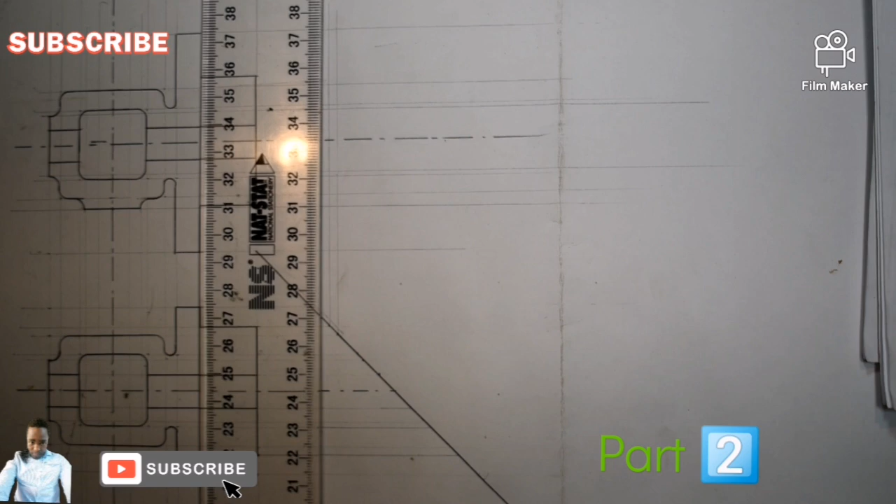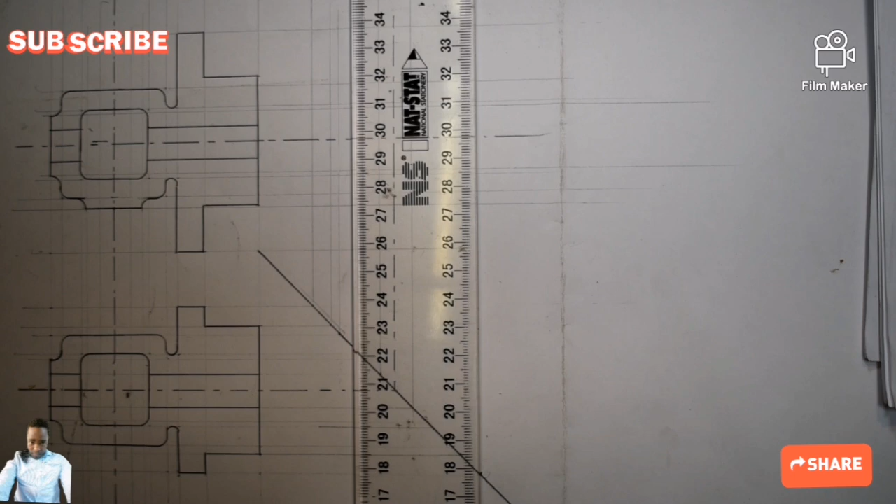Let's quickly finish up. So project this point up, this one up, there you go. So this one, it will remain as a center line. This is a center line. It's going to remain as a center line. So there you go. Yes, it's this one and that one. Let me mark them. There you go. The very last one is this one. You understand? There you go.

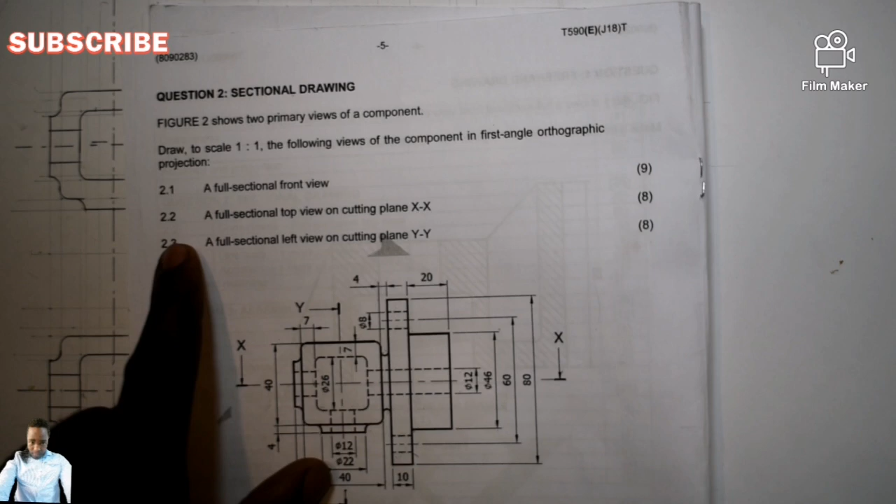Have this one. Have this one. So we are drawing the missing view. The missing view, which is 2.3, whereby they said to draw a full sectional left view on a cutting plane YY. And when you trace the cutting plane of YY, it's actually situated there by our front view. You understand? It could be situated in our top view.

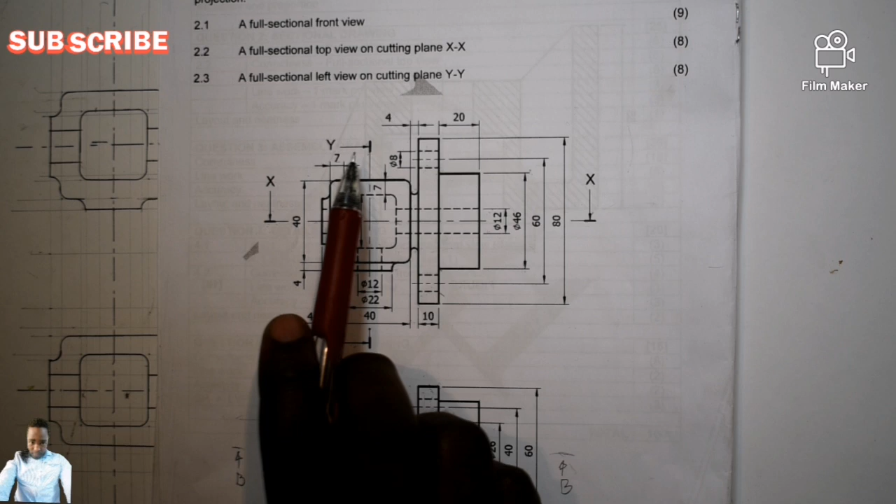It was still going to be the same thing, because we're going to project points. Once they touch the line of 45 degrees, they go up. So YY, and we draw what is being pointed by arrows, like I used to say. So our cutting plane YY, these arrows are actually pointing this direction. So this surface, we're going to see it clearly. So these diameter 8 holes, we are going to see them clearly.

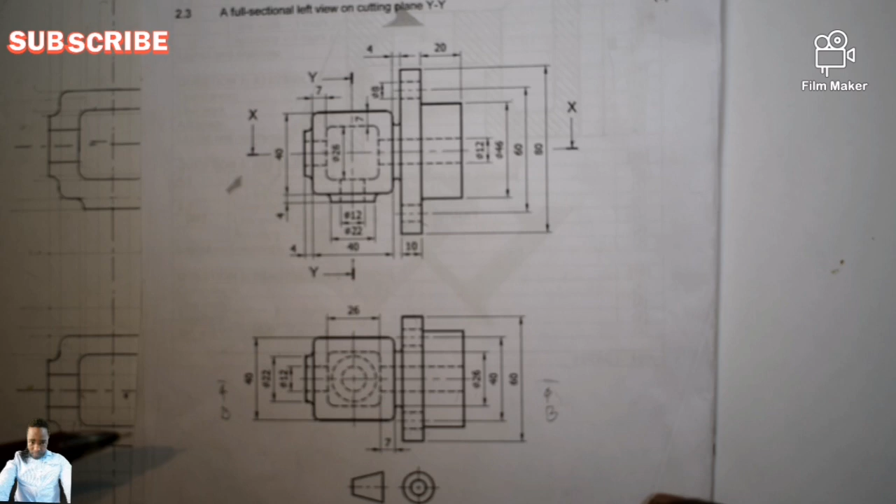So if there are 2 in our front view, do you see that there are 2 in our front view, and you check them again there by your top view, there are still 2, which means in total these diameter 8 holes, there are 4. You understand? That's when you're going to see them clearly. There are 4.

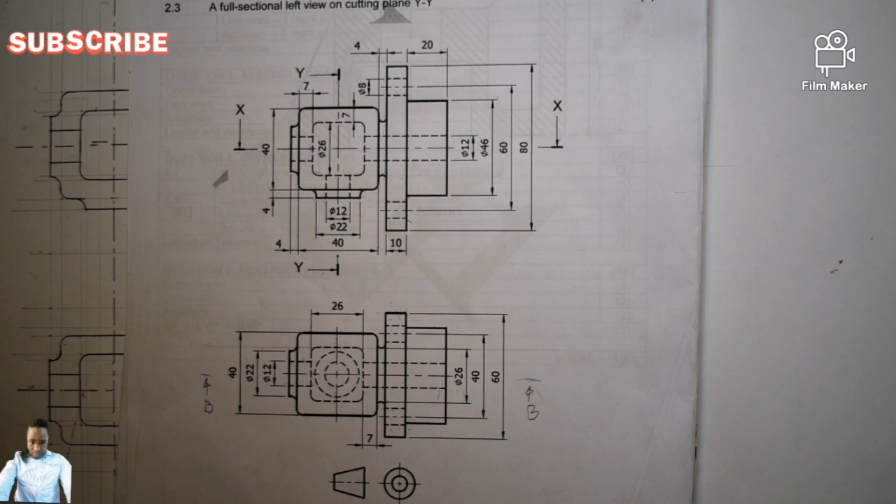So guys, some of your comments I might not be able to see because I'm concentrating on the drawing sheet, on the paper, rather than on the screen. Yeah, Mamito is saying, I last drew in 2018, drop out, enroll for entry next year. I'm very serious. I'm going to catch up. Yeah, my guy, go for it. I'll advise you, go for it. 2018, so it's not yet late. And we are here for you. I'll be visiting this page a lot. Yes, and you can still check it.

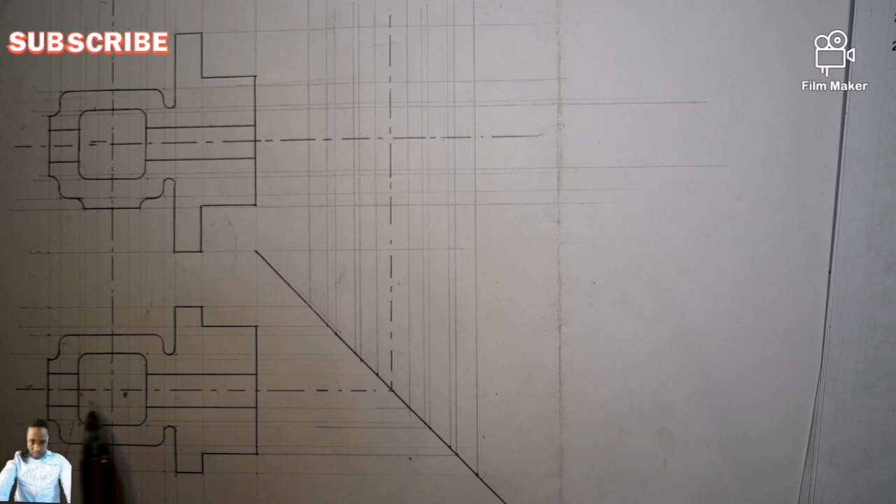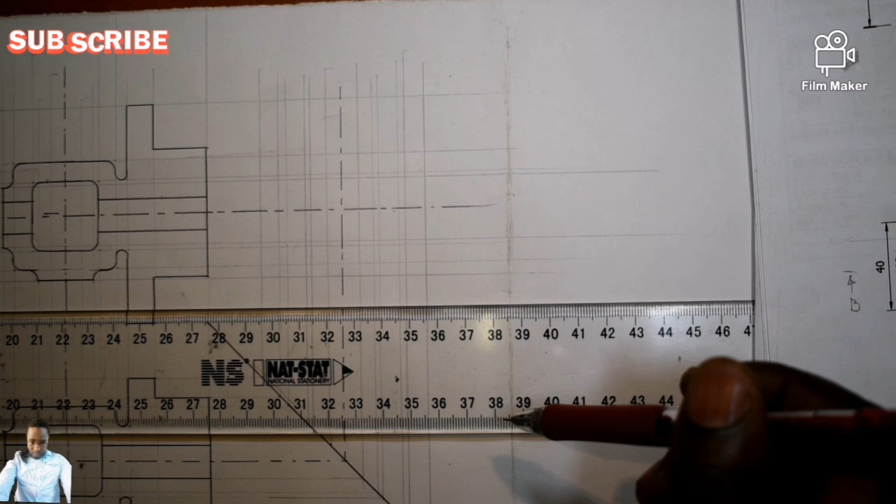Alright, so let's continue. So I've taken all of the points that are horizontal there from my top view. I've constructed them. Once they touch this line of 45 degrees, I project them up. So these ones that are here on my front view, they'll be just going horizontally straight. So it's this one, it's already there. The last one is this one. There it is. We've projected the majority of them, top view to front view, all together. So this is what is going to happen now.

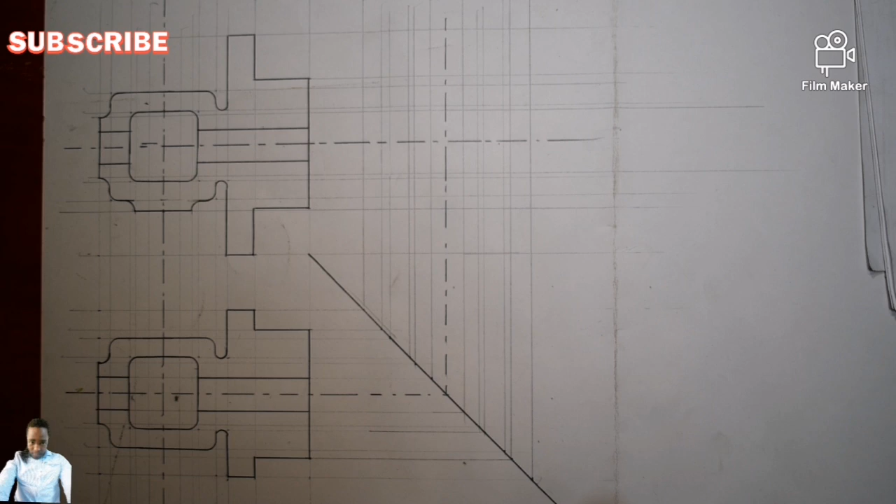So first of all, I'm going to trace this point in my left view. This point is actually along this line, right? So if I take it vertically towards my top view, once it touches, there it is. So I have a point here. So this point will be going horizontal till where? Who's going to tell me? The top view, because this point is that one in my front view, and in my top view it is that one. So how long is it supposed to be?

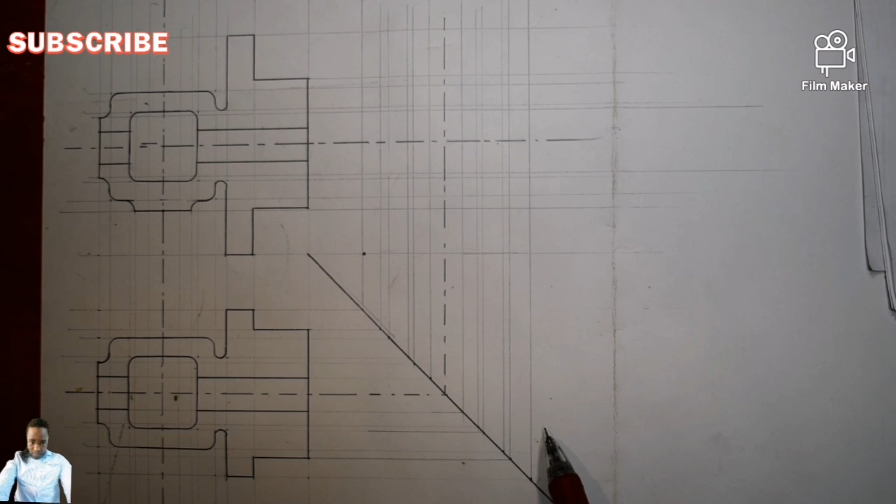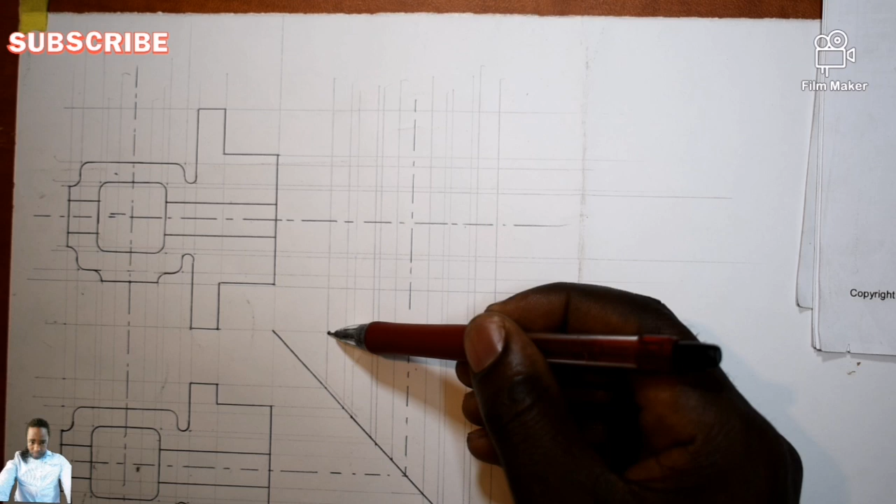I'll come back to my top view and trace it vertically. Once it gets here, I can now go horizontally. I go from here, I go up, which means it's right there. So I can draw this one dark from here till there. Dark. And let me project it up. I will first move it right from my front view, there it goes, up until right there. So in my left view I will know it's ending right there.

So then I can have it solid. There you go. So again, I did this other side, so now I know even this other side is supposed to be like this. Then I close it here.

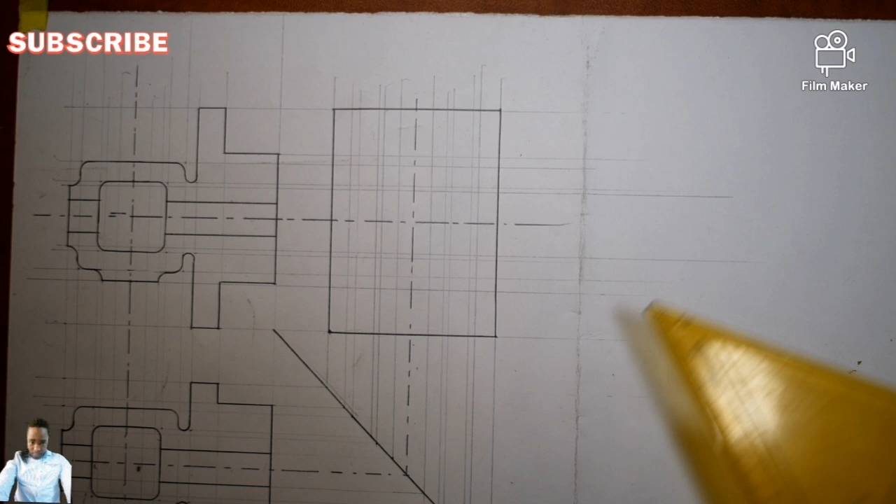Close it here nicely. Do you understand? So this is what I'm going to see if I put the cutting plane YY. The cutting plane YY right here. Because remember, it has been given. Why? You understand? So we draw what is being pointed by an arrow, isn't it?

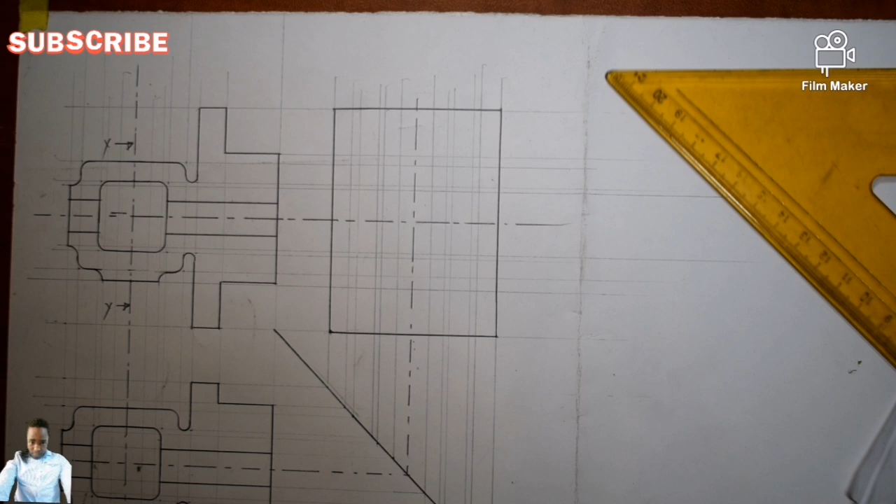So this surface is actually before or it's after the cutting plane, so we are going to see it clearly. You understand? What is going to be cut is only from here till here, not this other part. And check your front view as well as your top view. We've got diameter 8, like as I've said before. So this diameter 8, we are going to see them clearly.

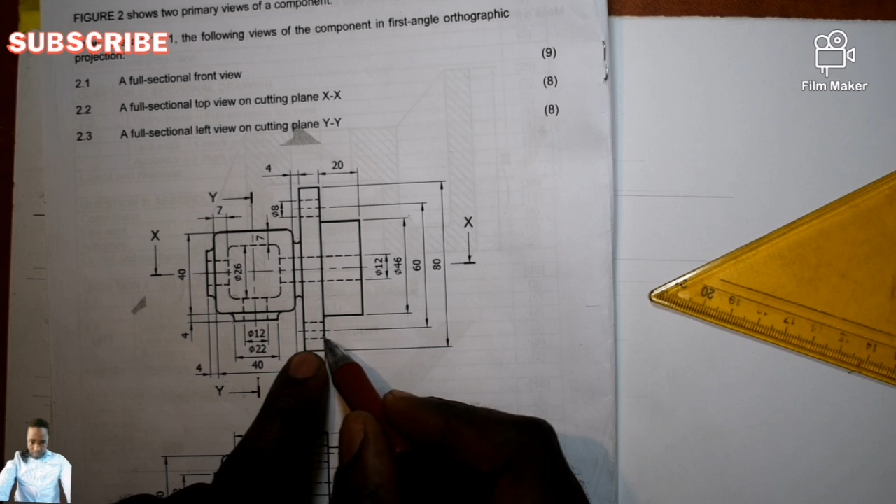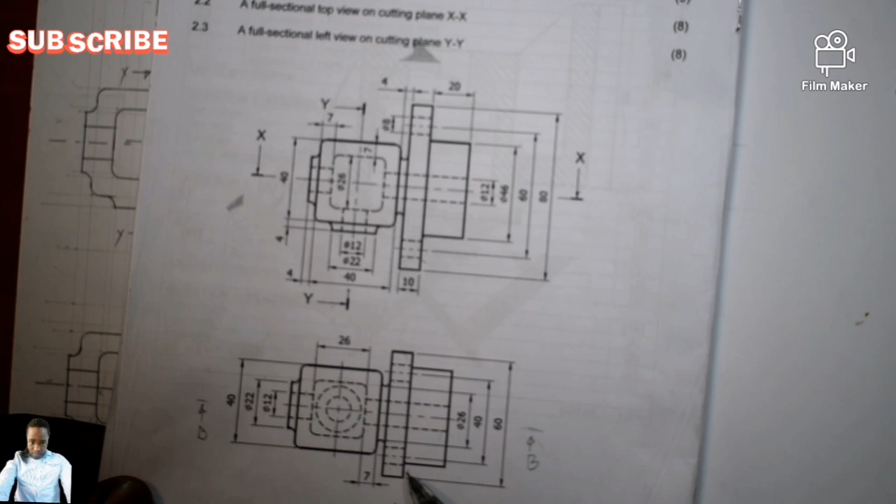A1. Then after that, what is going to happen now? So after that, we are going to look at their width, because in our top view, this is the width from here till here, it is not height, it is width or breadth. So their width is going to be how much? It's going to be 40. So check, I'm going to relate it right from as much as is given in our top view.

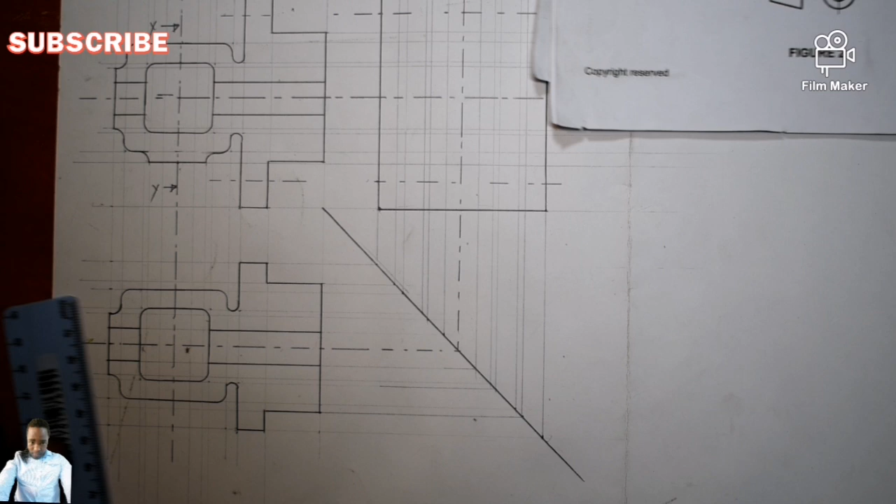So that 40, I'll do it on my top view again. It's either here or here, it will be still on the same thing. So 40 divided by 2 is 20, isn't it? Simply put it at 20. So I mark it 0 and mark it 40. You understand? So it's this one. It's actually on top of this line. So I'll know there it goes from there.

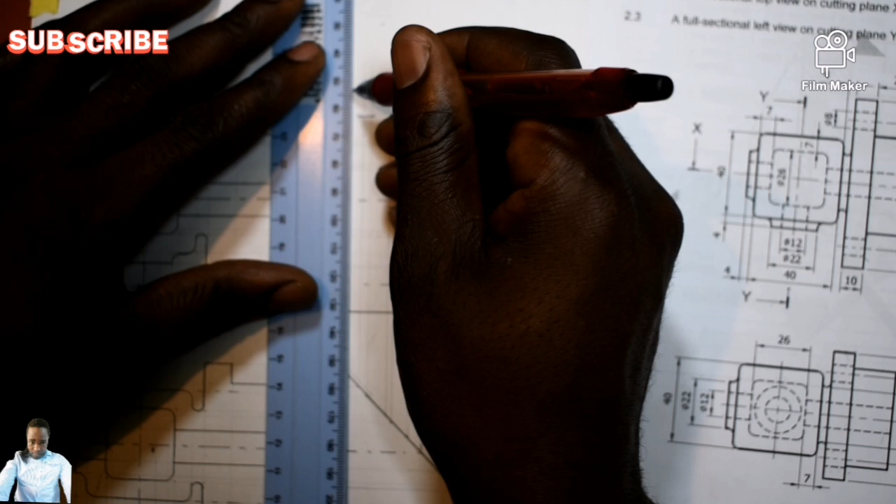I trace it towards my left view. So the vertical center line is supposed to be this one. You understand? So even this other side, it should be this one. I trace it first. That goes from there, that goes, so the vertical one, it should be this one.

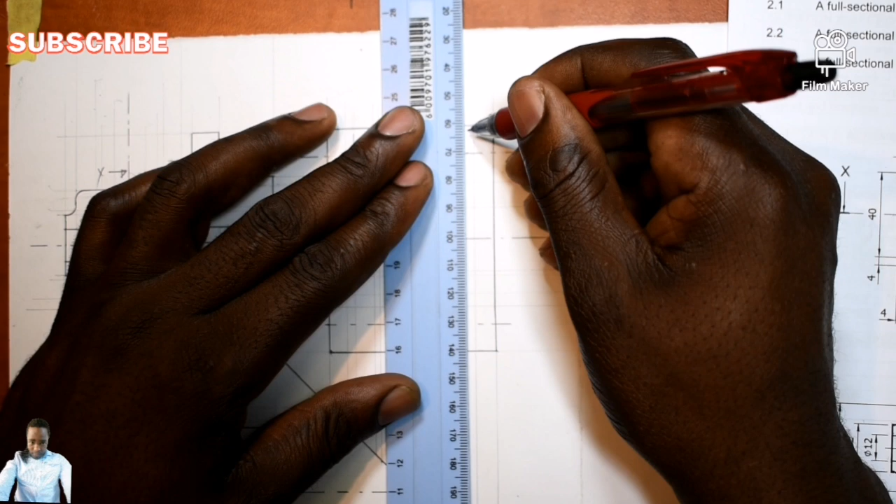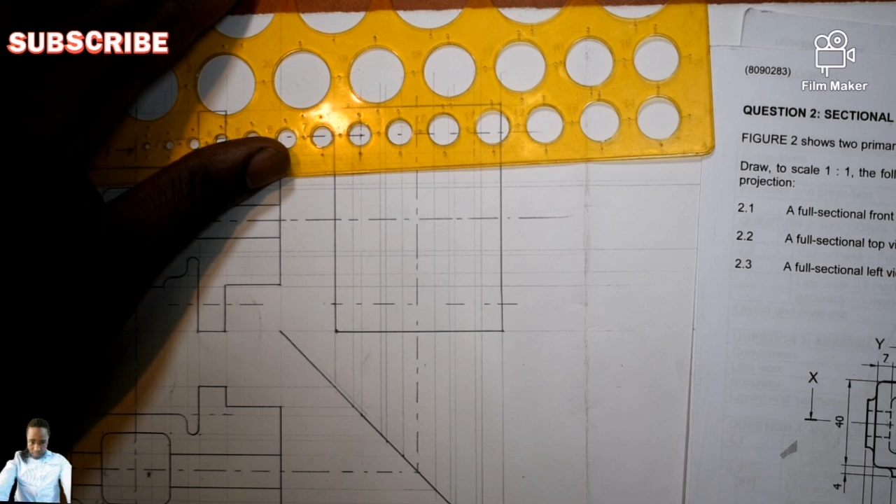So now I can draw the surface diameter, what? Diameter 8. It's simply open your drawing compass to 4mm, or you can use this stencil ruler. Since we have both centers, the vertical and horizontal, diameter 8, we are going to see them clearly now. Diameter 8, in this other side, diameter 8, you understand.

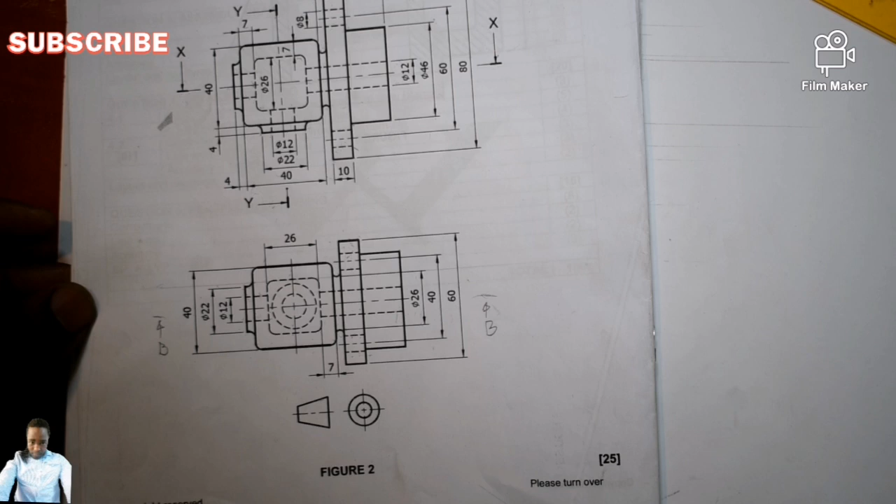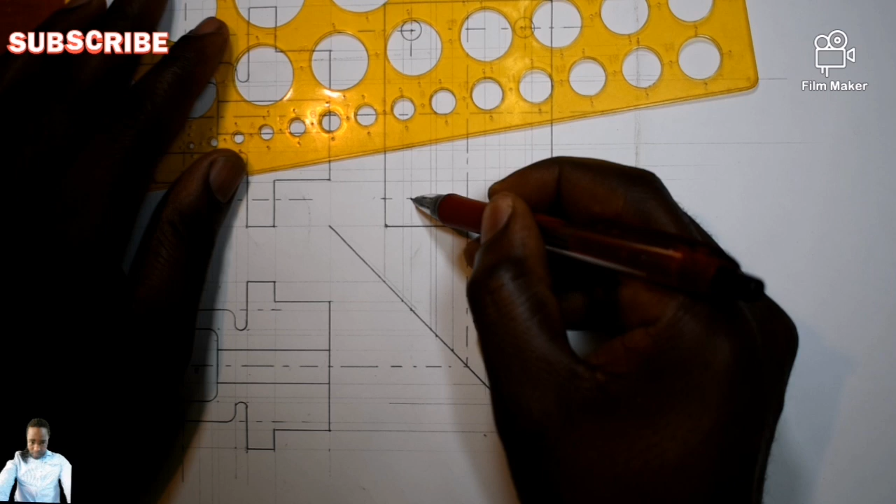So this diameter 8, even down here we are going to have another one down here. Who's telling us that? It is our top view and front view, you understand, because we've got 1, 2. And when you check there by your top view, you've got 1, 2, which means in total they are going to be 4, you understand. So which means on this other one, the vertical center line, it will be this one. Diameter 8. And this other side, diameter 8.

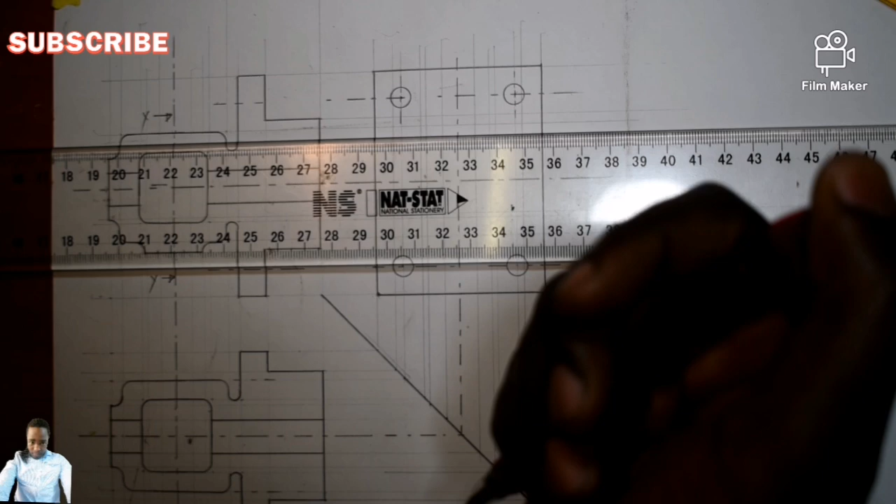So then let's expose what is going to be cut, because this is actually before the cutting plane, you understand. So we know the cutting plane started to cut here till right there, you understand. So now if I trace this, it's actually this point, there it goes, actually this one. It's actually this line, it's this one. So now how am I going to say what is dark from here till here, or what is really happening there, you understand.

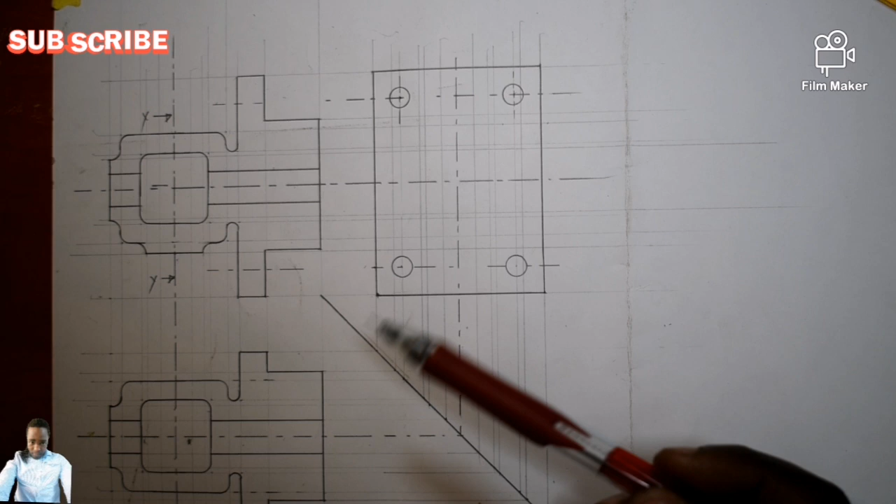So to see that one clearly, I'll take this point straight to my top view, trace it down, it is this one, isn't it? Once it gets there, this point must collide with this one that is going straight there, right from my front view. So this one goes straight, right? I've just marked it there.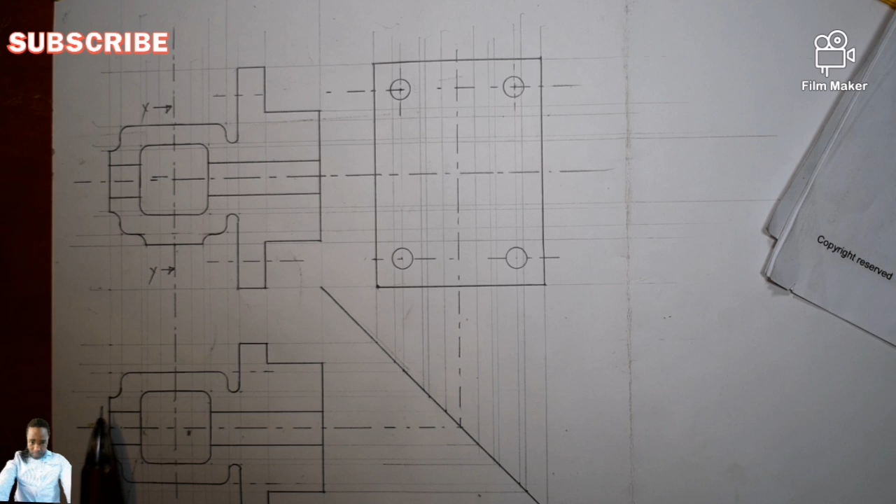So this one, now take it vertically, then once it touches here, I'll take it horizontally, there it goes, then from here it goes up and must collide with this one. So which means I have to have this here, and I am going to do it just a little bit short for now. So there it goes, just do it a little bit short for now.

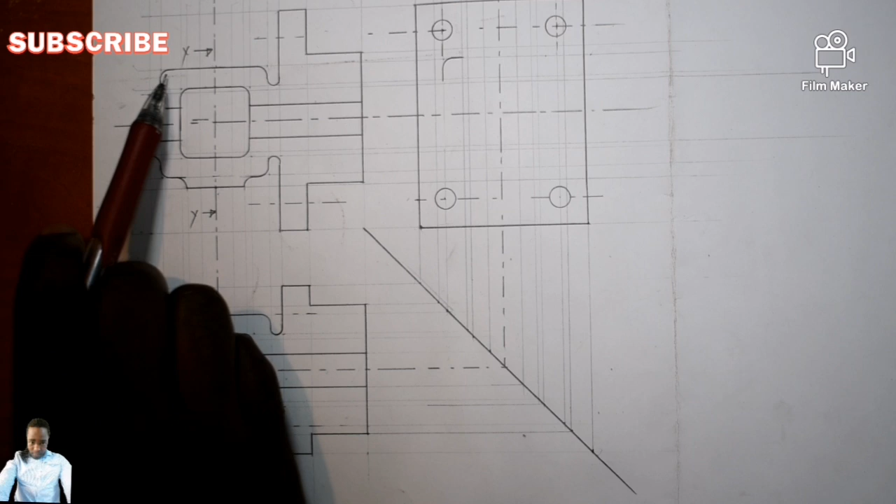So is it going to be which one? This other side. Go back to your top view. Remember, you trace this point horizontally, isn't it? Horizontally. Let me try to just zoom a little bit. Then that goes. Now you take it vertically. There it goes. Once it gets there, you take it horizontally. There it goes. Once it gets there, it goes up to collide with what is coming from your front view.

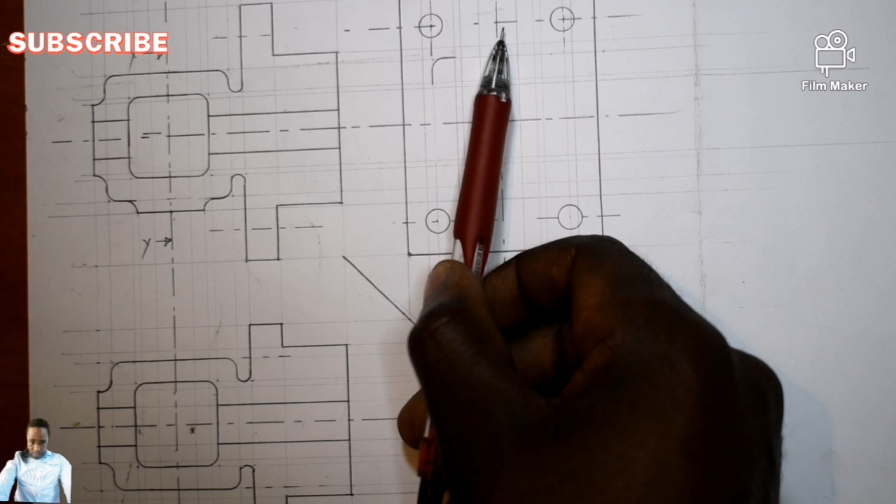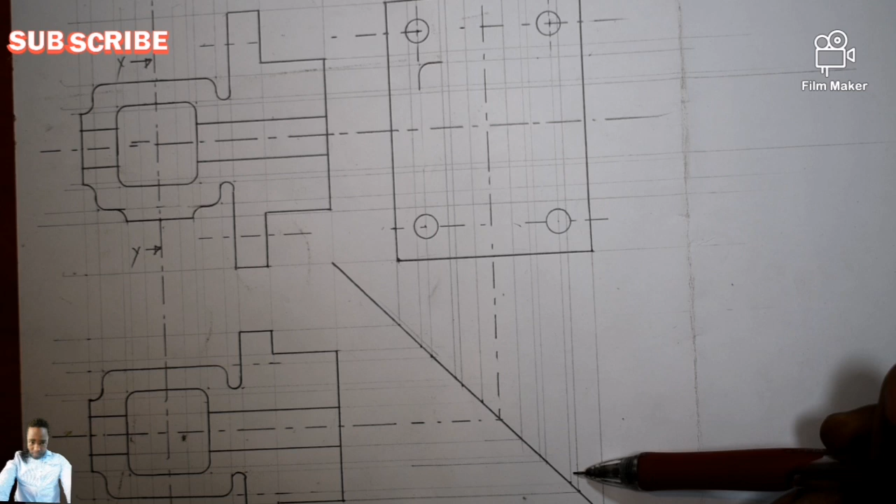So that is why I had a point there. Here. So now we don't know whether it is this one or this one, understand. So let it come out by itself. How? Go and further take it down from your top view, down until this point, then take it horizontally. That goes, then from here it goes up until this point, you understand. So once it gets there, then I can have this now dark, you understand.

So I've gotten this part of my left view, you understand. So remember, whatever is beyond your cutting plane, you consider it as an offcut. Which means this part is supposed to be out. We are not even going to bother ourselves drawing this one, because we consider it as an offcut. So the hacksaw started to cut from here till here. From here till here the hacksaw was not cutting anything, it's a gap. From here till here the hacksaw cut it, you understand.

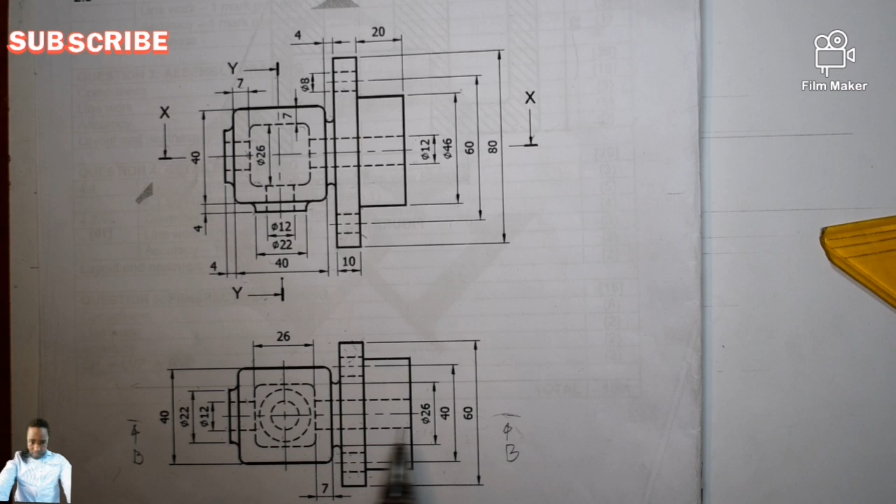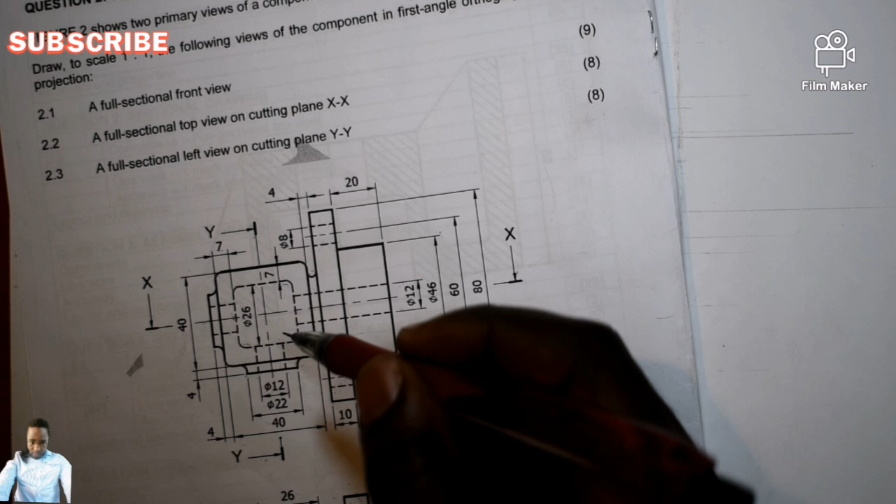So this one, which is that one, right? So now we've traced this point, which is that one in our left view, isn't it? So now we are going to move from there till there. It's still one and the same thing, isn't it? So then you trace this point horizontally. There it goes, along this line, isn't it? I just put a point there along this line, you understand.

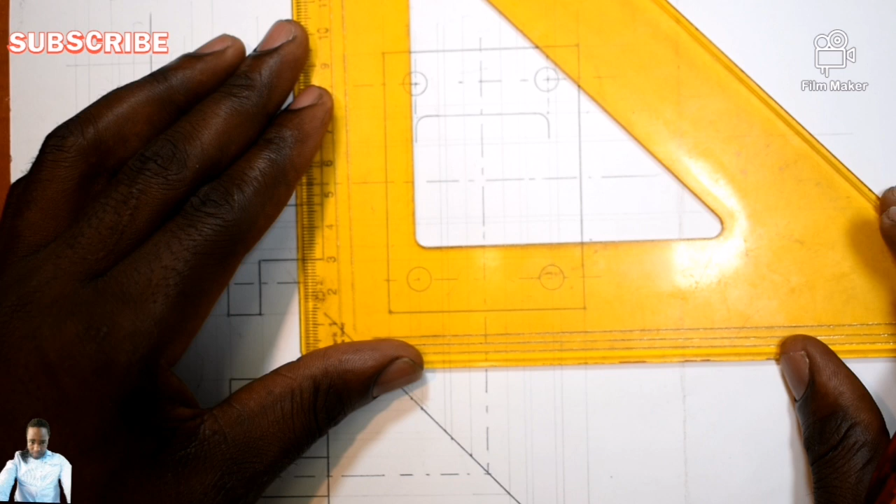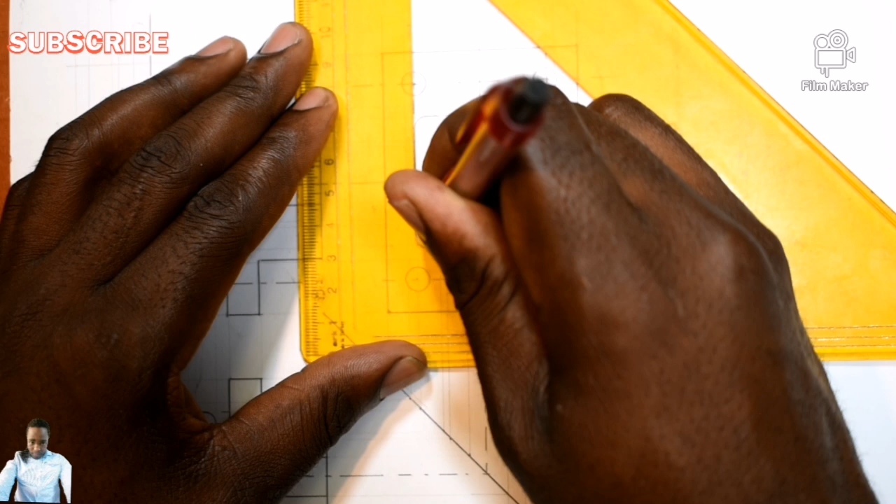So now I know it's supposed to go down until somewhere here, you understand. So I can simply construct it, since I've constructed what I did before. I know that it is actually in the same vertical line. So I can simply construct it like this. Be careful. So there you go. You understand? So even this other side, there it goes. Which means it's supposed to be somewhere here.

You understand? So why am I not closing here? Why am I not closing there? Because take a closer look at your front view. You see that it's not as straight as compared to the upper part. The bottom part has something going down there. So you have to get it. It should be still the same as that of your front view, still the same dimension.

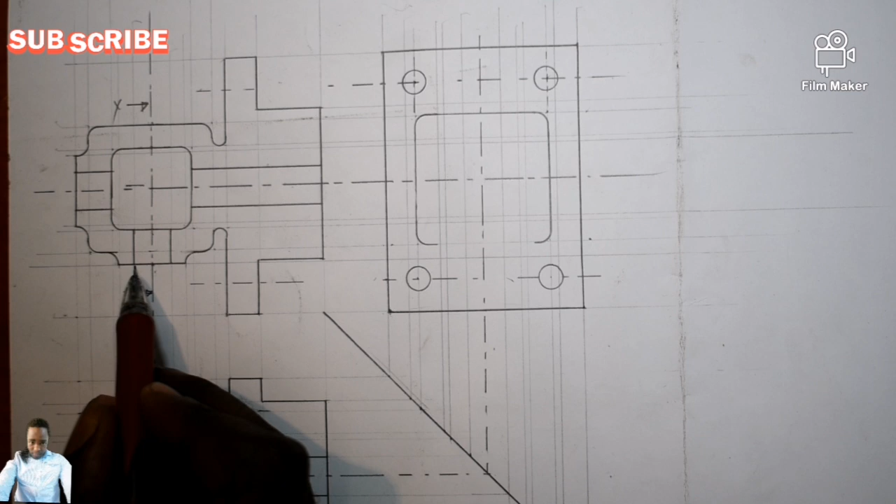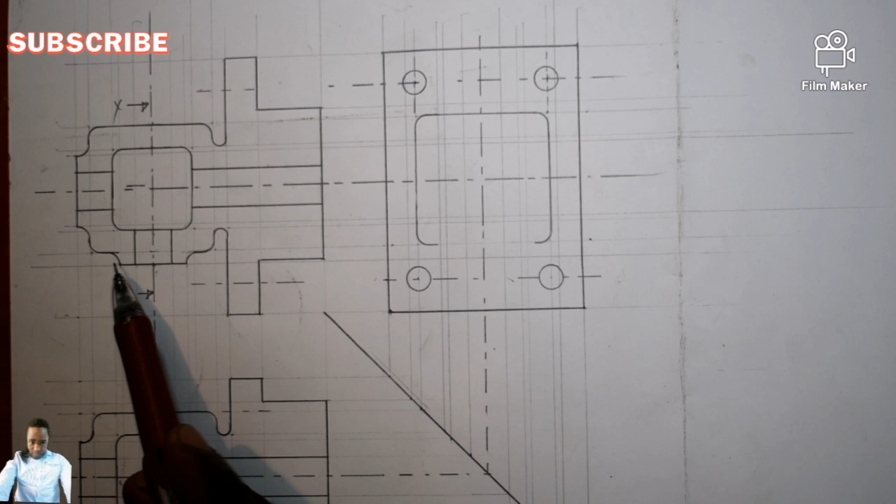So to get that, from here construct it up until here. But which point along this constructional line of mine, you understand? Remember that it is this point, isn't it? So now I am going to construct this point horizontally, it was already existing. Now take it vertically towards your top view. There it goes, up until right here, isn't it? No, it's this one. Then from there it goes. There you go, it's constructed. From here, which means I'm going to have a point right here.

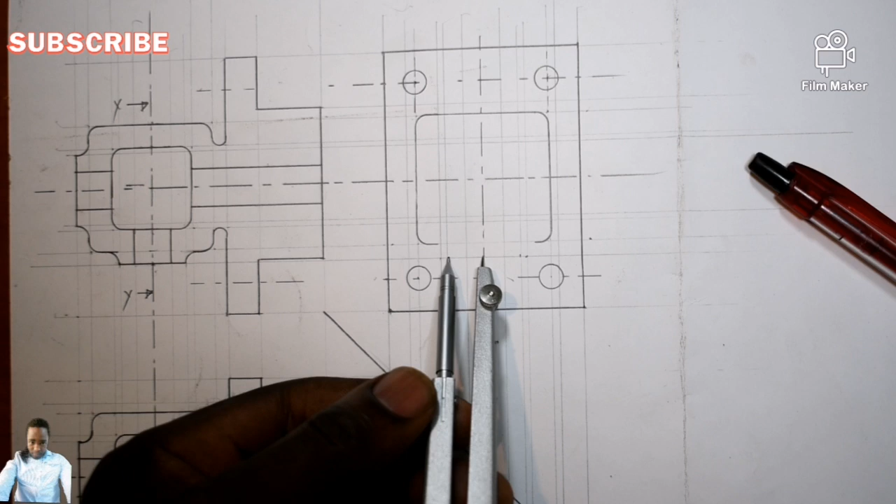Then from there it goes, which means I'm gonna have a point right there. You understand? And to confirm that, remember they said it's a diameter. So from here till here is 22. So if I place my drawing compass from here till here, that's 22. It must be the same as from here till here, which means it's this one and this one. So the correct one is this one and that one, because it's supposed to be diameter, it's supposed to be the same.

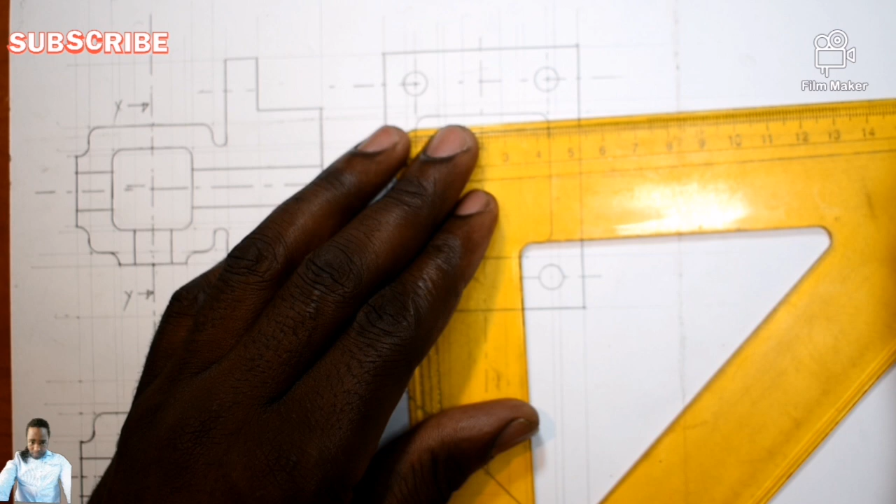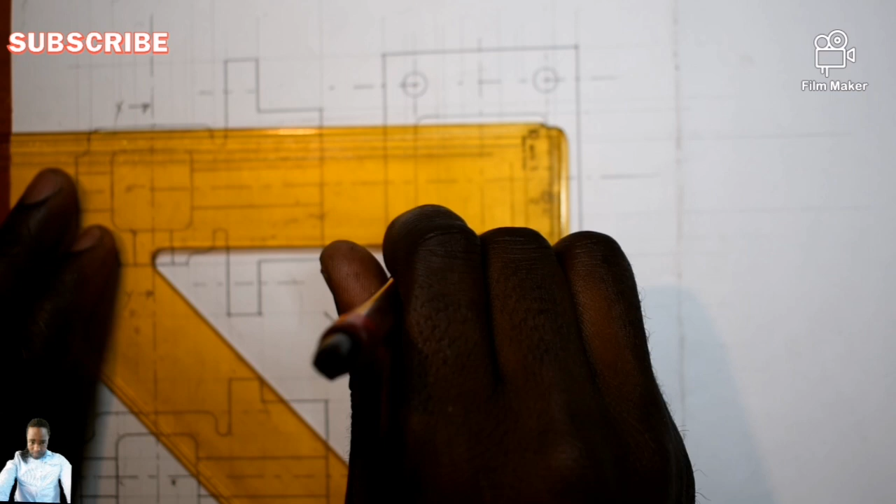So now I can have that from here to right there. You understand? And construct it. Like this. And this other side. Like this. And then what is going to happen now? When we cut, or trace this cutting plane Y-Y, cut from here till there, cut from here to here, it's a hole.

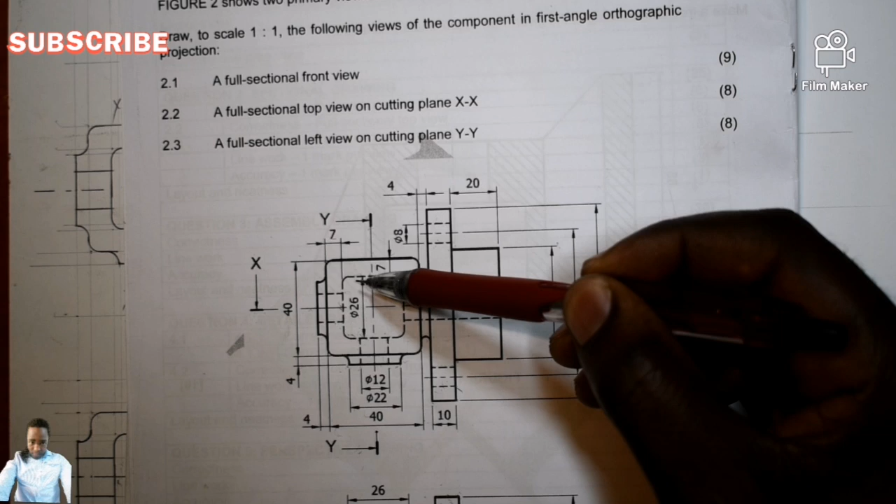And remember, they said it's diameter 26. So when we are viewing it on our left view, what we see seems to be a square. When you are looking at it directly like this, it seems to be like a square. But when you read its dimension, they're saying it's a diameter. So when you come to view it on your left view, it's supposed to be what? A circle. Supposed to be a circle.

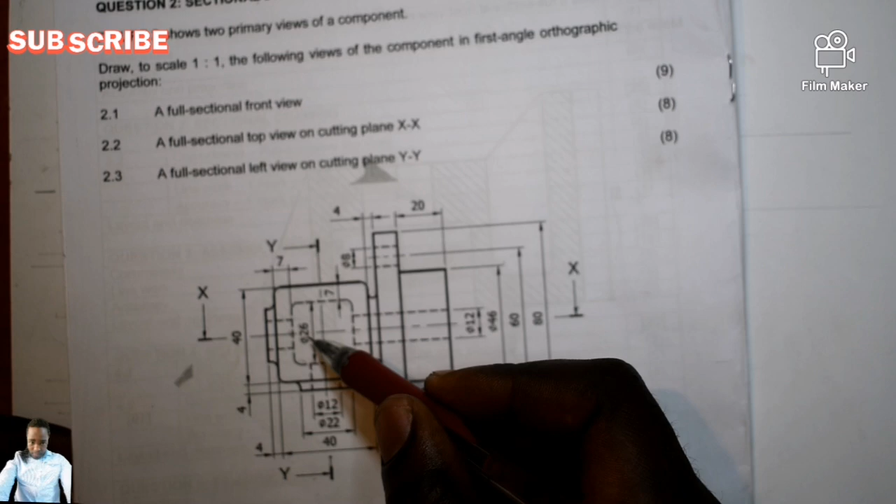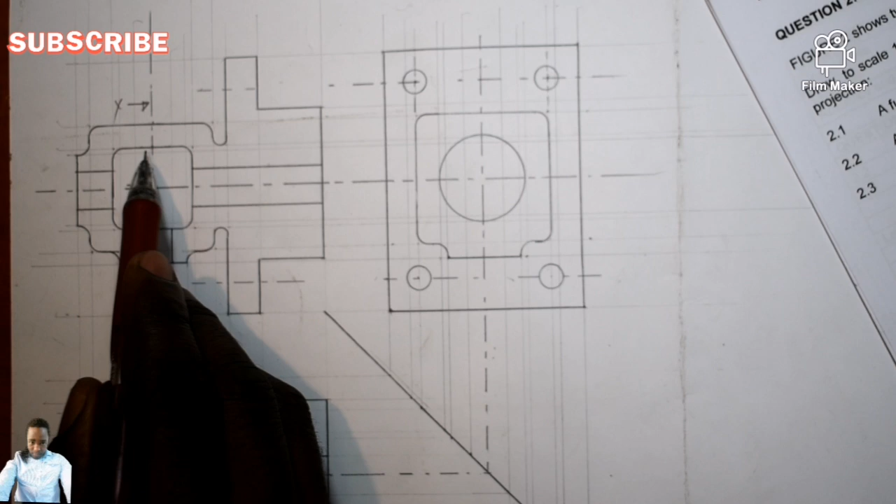So now I'm going to say 26 divided by 2. Where is my ruler? It's 13, isn't it? Okay, so I can simply put my drawing compass at 13 or use this tool. Do I have 26? Yes, this is my diameter 26. Put it along the centers vertically and horizontally and draw it without fear or favor. You're supposed to get it like this. Why? Because they said it's diameter 26, and do you see that there it goes, it tallies with this one. Even this one tallies, which shows that we are 100% correct. Because from here to here is 26, which is this diameter.

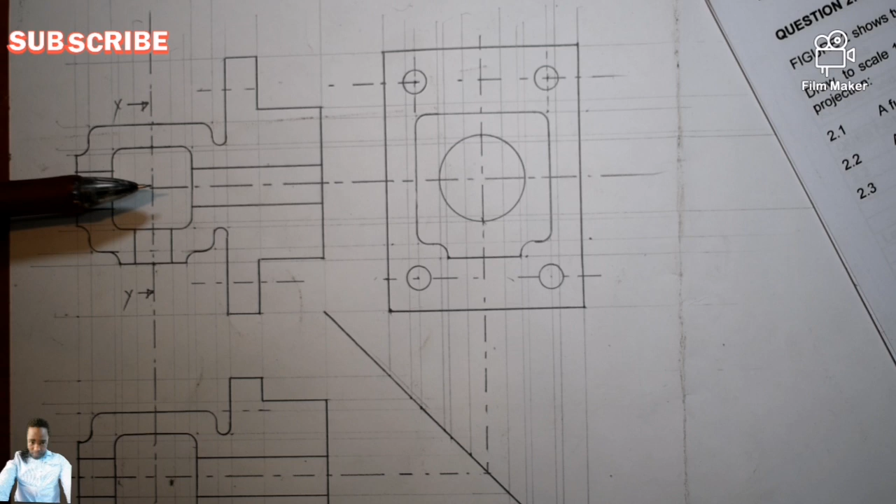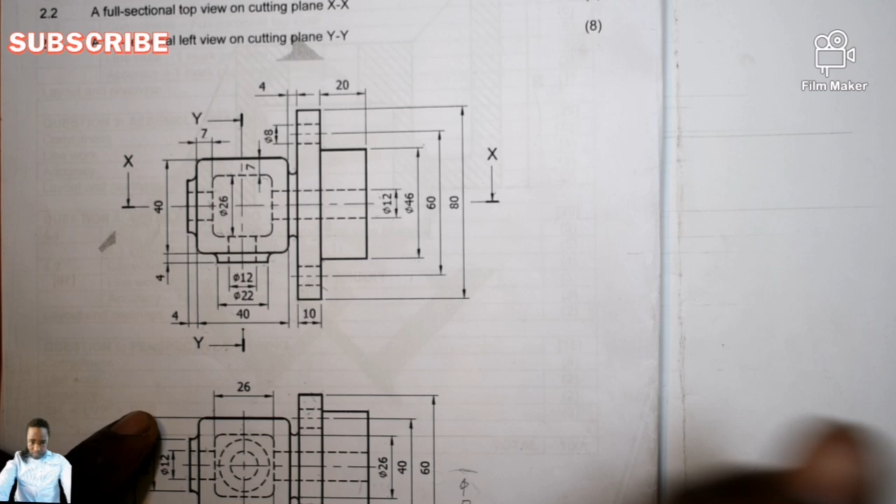So why is it a diameter now? Because remember guys, we are viewing it Y-Y. So when you check it on this other side and you draw it directly like this, it will now be a diameter. And inside this one, there is another diameter that you're going to see clearly. Diameter of what? Of 12. Because this one, we are going to see it clearly now, which is diameter 12, which means inside there must be diameter 12. Where is it? Diameter 12.

So I can have this one so dark. You understand? So if I construct this one, you see that it also tallies. There it goes, just a constructional line. In this one, just a constructional line. And so it's diameter 12. So this is what is going to be in sectioning.

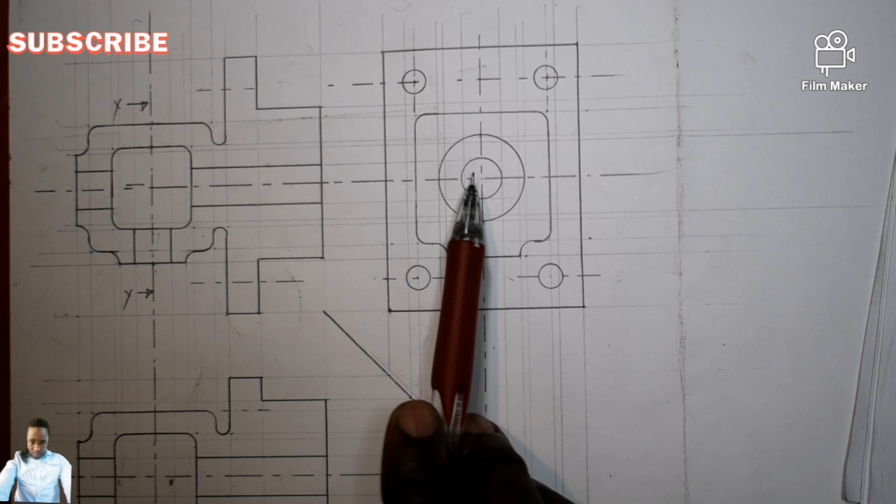So from here till there, from here till here we cut it. So there it goes, it's this one, from here till here. This one is that one. This one is this one. You understand? So from here till there is which one? From here till here. Because this one is a little bit back. You understand? It's a little bit back.

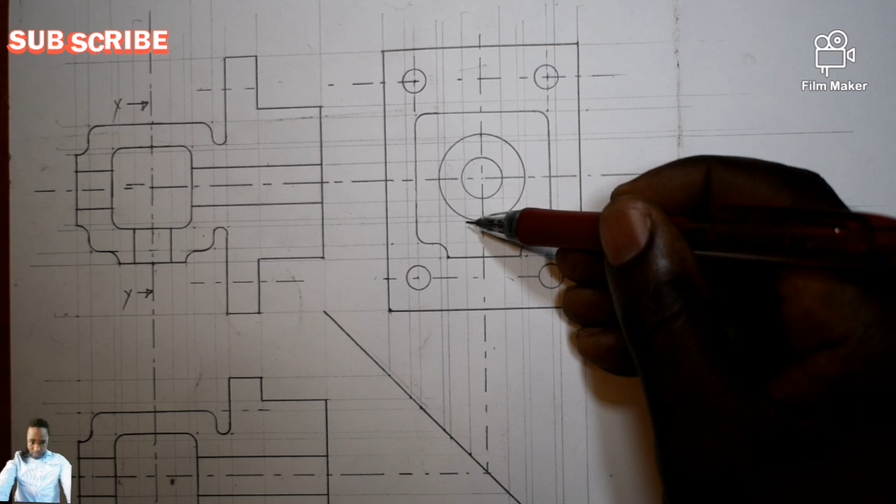Who's telling you that? Your what? Your front view. Because from here till here, you see that gap. So it's a little bit back away from your cutting plane. You understand? So this hole was cut through along its height. Which means we are going to have another solid line here from here till there. And how are you going to trace that?

So its diameter what? Its diameter 12. From here to there is diameter 12, which is the same as from here to there, which is the same as from here to there. You understand? And we do have it down there in our top view. So you trace it, there it goes. From there it goes, which means I'm going to have a point here. Another point here. So the height of these holes of mine, it's going to give me that.

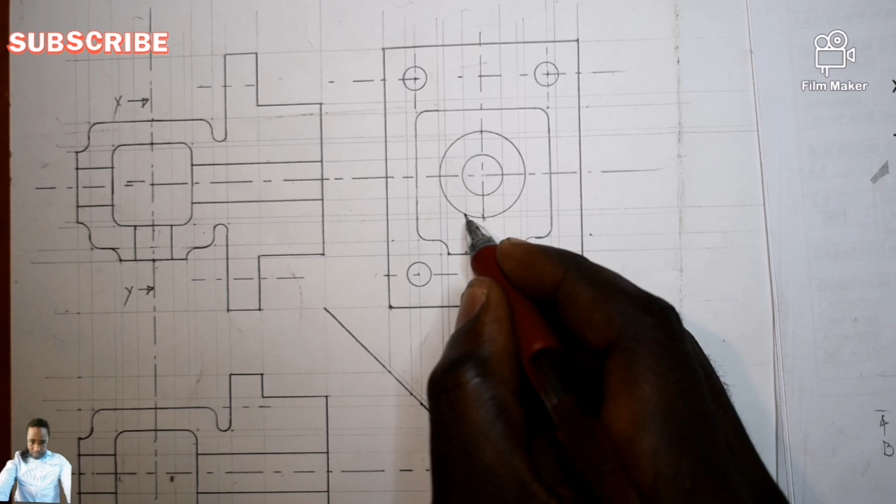So there will be dark till where? Dark from here till right there. So remember, which is this one. So from here till here, isn't it? So trace it, which means there will be dark from here till right here. So construct it dark.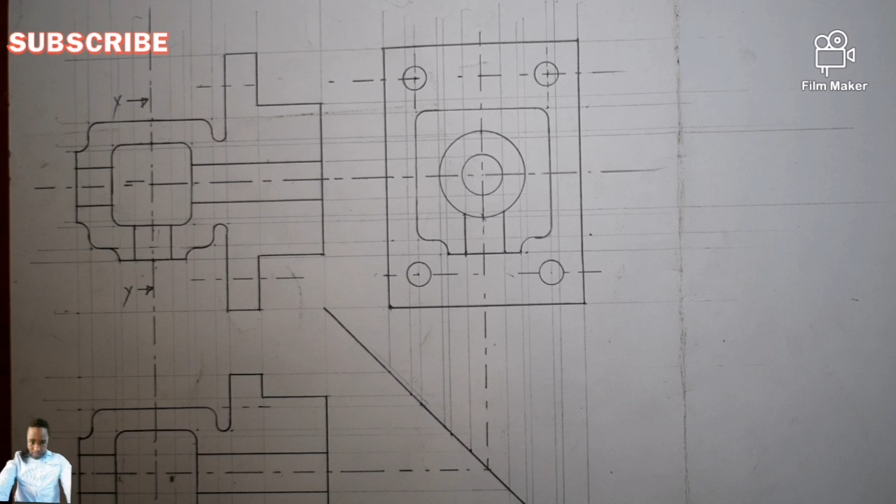I know drawing the missing view used to be a little bit challenging, especially drawing the inside missing view. You understand? As much as constructional lines, I think everything is done. So let us now section. These are now internal views. When you section, we are sectioning using 45 degrees, and all your hatches must be equally spaced. You understand?

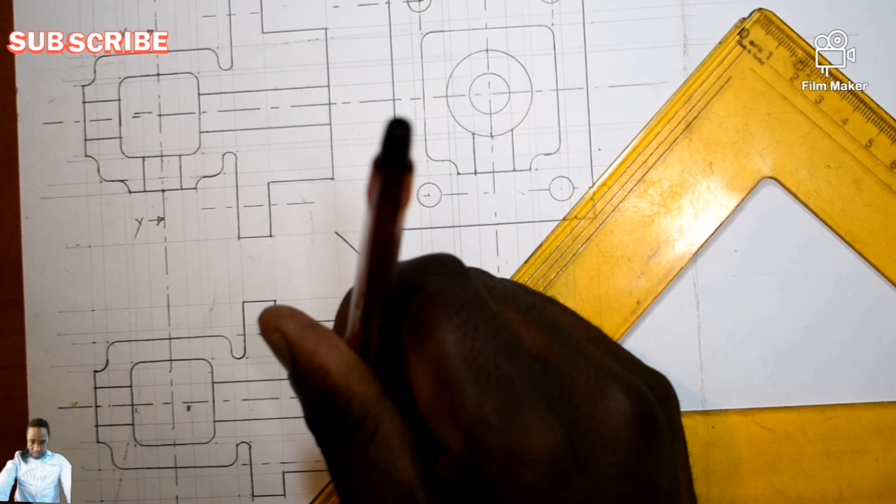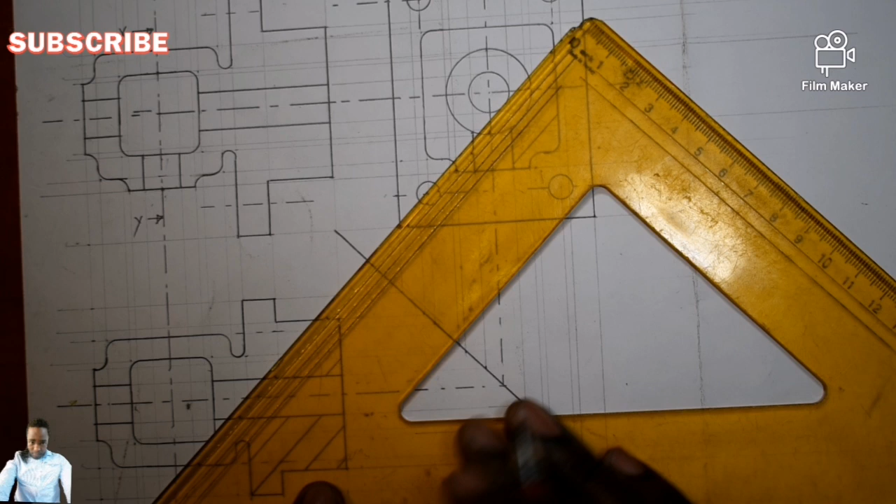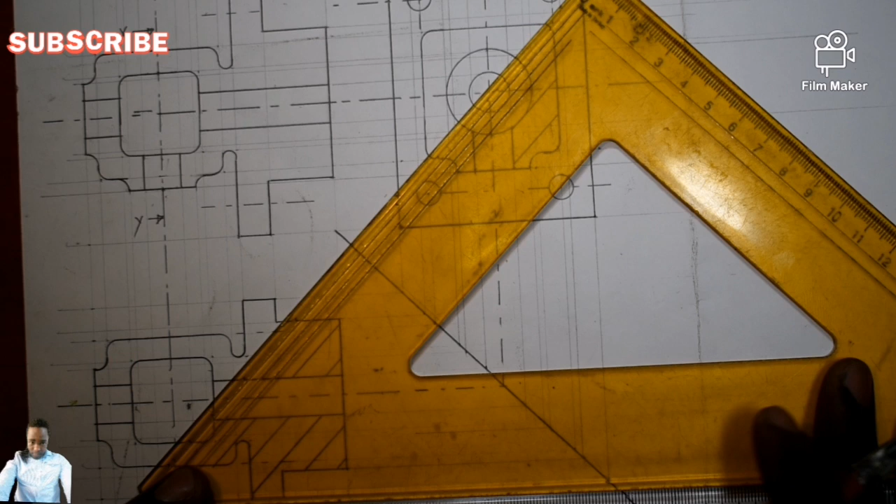But here it's going to be in sectioning. In here, going to be in sectioning. In here, don't forget. From here, this one in sectioning. This one comes here. There you go. Everyone, you see that I'm sectioning them simultaneously, the three of them. So here we go again. Like this. Like that. So push your set square. You can have it here. Have it right there.

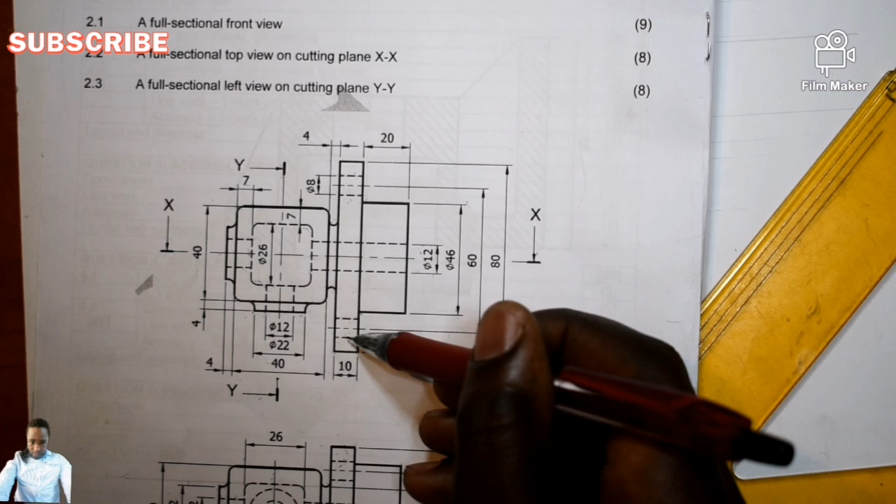About these holes, I've explained in part 1. But why are they not becoming dark? Just scroll down to look for the video for part 1, because this is part 2. So they will disappear. 1, 2, 1, 2. In our front view again, 1, 2, 1, 2. They are going to disappear. So that is why here we are not having anything dark there in our front view.

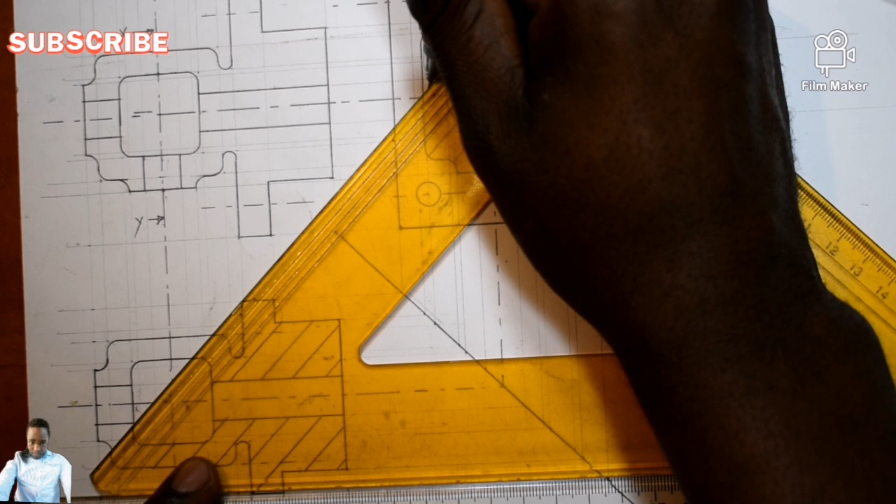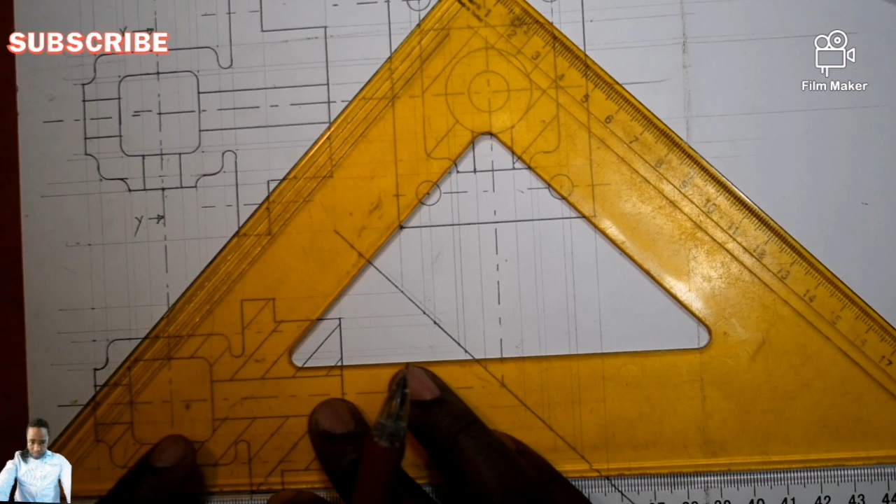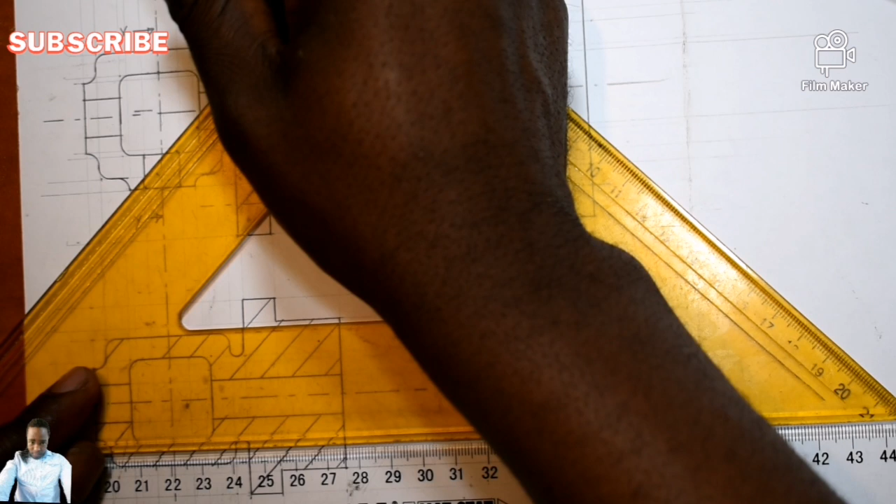There you go. Okay, so that was the last one in our left view, but the front view is already in with the hatching. There you go. Finish up. You must take your time. Remember, the more you tighten them, it's time consuming, and the more you separate them far from each other, it's a problem again. So that was it.

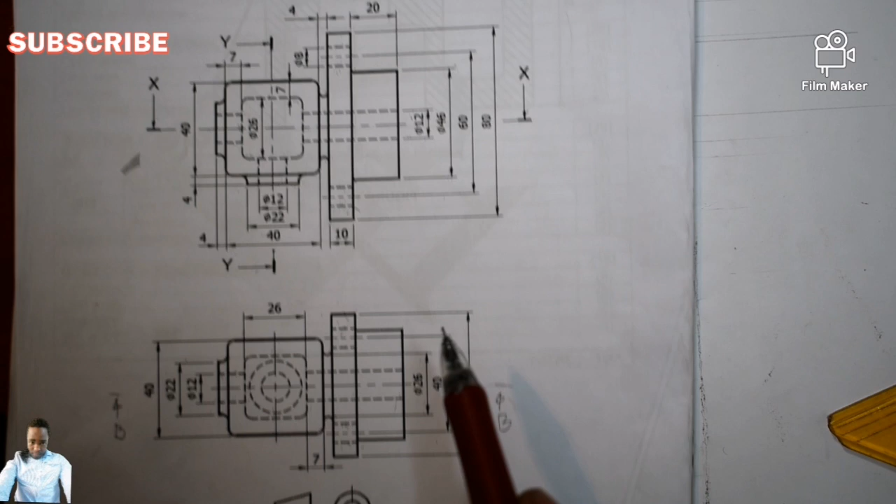In the final examination, do not draw what you are not asked. You will see a student drawing the projection symbol and the title of the drawing, thinking that there will be marks. You draw what is the question. The question will tell you to insert the projection symbol, insert dimensions. In this case, you are done like this, because they didn't say draw the title block and the scale.

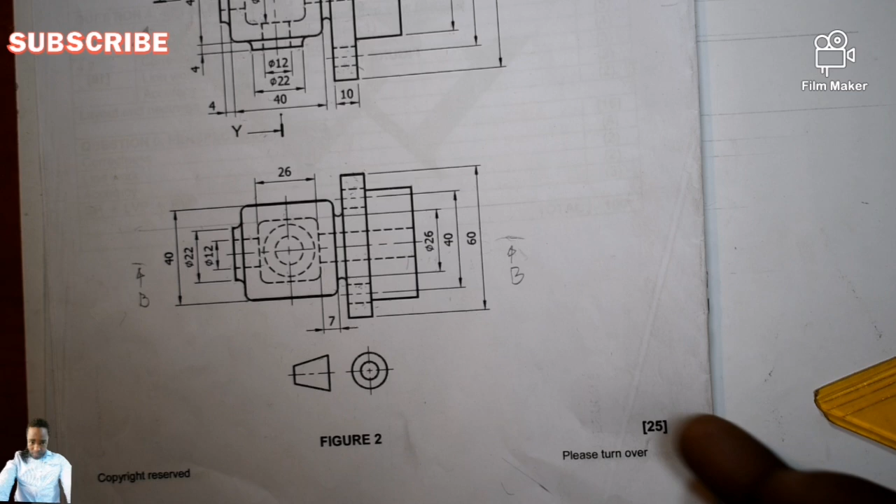No, you'll be just wasting your time inside the examination center. Do not draw what they didn't say. So don't waste your time printing the title block, the scale 1:1. In this case, they didn't ask you about any of those. So you submit your work like that.

So thank you very much, guys, for watching. That was Mr. Ngosi of engineering drawing for this previous question paper that was written 2018 July. It was an X paper.